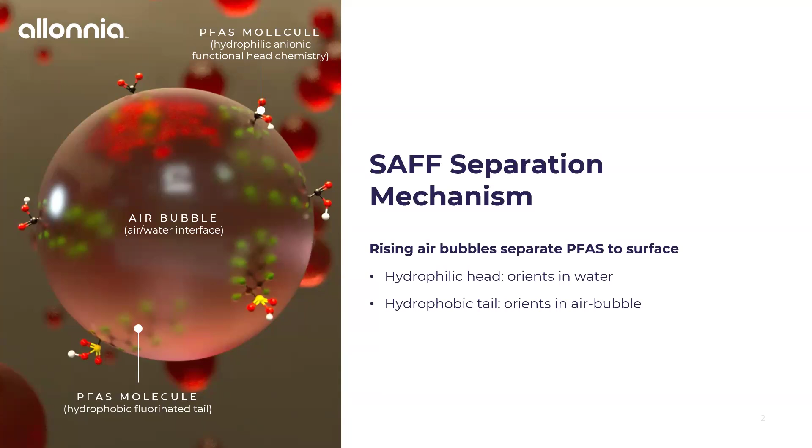As we rise the bubbles to the top of each of these fractionation vessels, which I'll show you, we are separating them in a foam matrix, removing the foam, condensing that into water, and that's kind of the overview of the process. Now, specifically for this presentation, we're going to be talking about some commercial applications of foam fractionation.

Specifically using these three kind of containerized systems, this gives you a sense of the scale of where we're operating. This is full scale, operated at landfills. Today we're focusing on talking about landfill leachate, though it could be at other sites. We're typically operating at 10, 20, 100, or several hundred GPM, and that might include multiple containerized systems, or something developed out of the box.

But the case studies that we'll talk about later today are mostly focused around using these kind of containerized systems. So we're looking at 40-foot shipping containers up to 100 GPM, or more commonly, maybe around 50 to 70 GPM, which would be pretty common for a lot of private or municipal landfills.

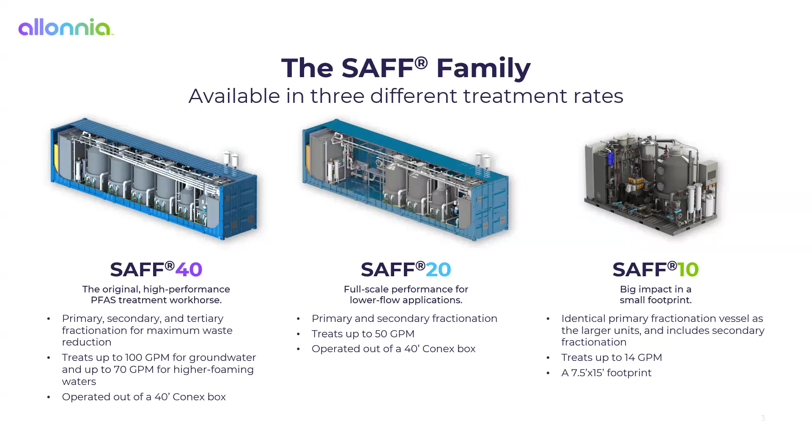Now, getting into a little bit more about what's in the box. So I talked about the foam fractionation process, how we're introducing air. What we have here is a batch-wise process with 4 primary fractionation vessels in parallel. So when I say primary fractionation, I mean the untreated water coming in from your site, so PFAS-impacted water, entering each of these 4 batch vessels in parallel sequence. They operate under a fixed set of parameters where we're varying the amount of air we're adding and the fill level in the vessel.

We might also be using some sort of additive or co-surfactant to help bind the PFAS to the bubbles, or other additives such as water chemistry adjustments to optimize performance, reduce scaling, things like that, common options that might be applied in these treatment trains. It's going to undergo that batch process and then discharge treated water.

Now, from that first process, remember we're generating a foam waste. So maybe 5, 10, 20% of that initial volume is going to be a primary foam fractionate or foam concentrate waste. And that primary waste product from this step undergoes iterative sequences of further fractionation. So we're repeating the foam fractionation process, this time under different geometry and using applied vacuum, to try and create a tall foam column.

We almost think about this like a dewatering step. So instead of the primary foam fractionate from this first process where we're making a lot of waste, here in the secondary and tertiary steps of foam concentration, we want to make as little waste as possible. I'll talk about why that's so important and how that ties into our next presentations from Revive.

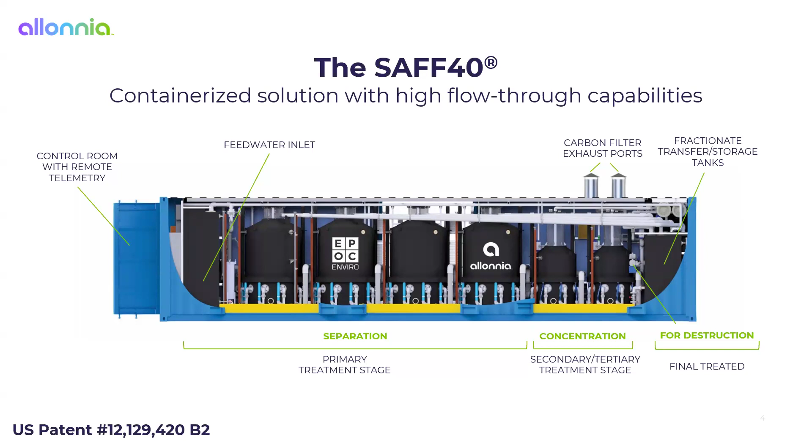So finishing out these final waste concentration processes, we have a low volume, high concentration waste for destruction. Again, this is kind of a containerized water treatment plant, so that includes control room, telemetry, all of the air is routed through air emissions control, and all the storage tanks you need are on board. We typically deploy these for pilot systems and full-scale installations at landfills, commercial facilities, or remediation sites.

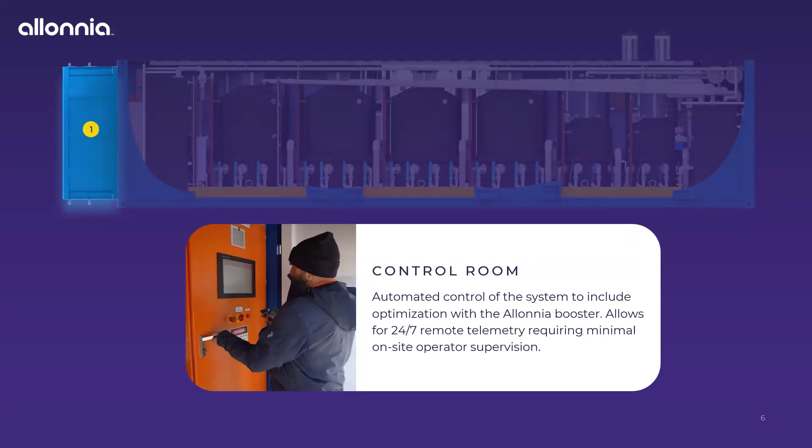Just walking through this in a little bit more detail, you can see a picture of the control room here. This is where our on-site operator would make changes to the aeration settings, batch times, things like that. Water is coming in through a holding tank here, so we have essentially one equalization holding tank.

One great thing about foam fractionation compared to some of those other technologies we referred to is that it's not very picky with respect to pretreatment. So we don't need to worry about things like high concentrations of TOC, TDS, TSS, almost all of that, and we've even run just straight landfill leachate with no pretreatment whatsoever, straight through the foam fractionation process.

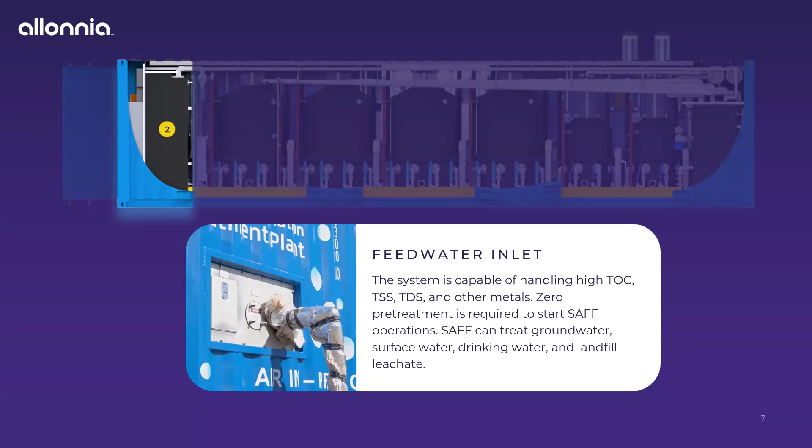Now that water foams naturally because of all of the other co-contaminants in the water, not usually the PFAS, but tends to be TOC and a cocktail of other chemistries that contribute to foaming in landfill leachate specifically. So part of the cost benefit, which I'll talk about more in a minute, is avoiding pretreatment costs associated with carbon or resin-based systems, which might not work very well with a really high-strength complex matrix like landfill leachate.

Now, again, primary treatment, so we showed those 4 batches. Here you can see in a little better detail where we're introducing air at the bottom through these venturis. So rather than using an air diffuser or something like that, we are pumping water continuously, small orifice, injecting air, and creating very small bubbles.

So we're trying to maximize, to some extent, the amount of surface area of the bubbles. That's more important than air volume, which you might be more familiar with if you've ever worked with technologies such as air strippers.

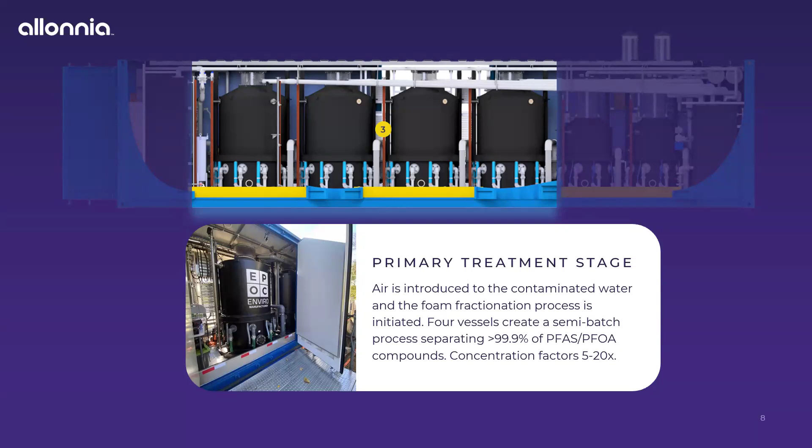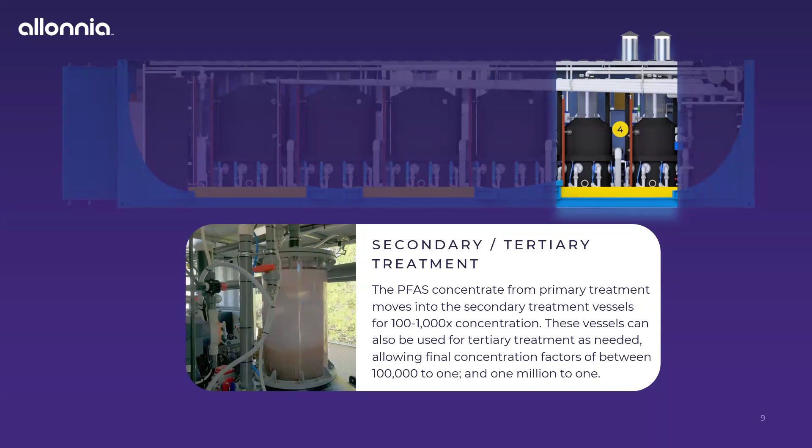Again, treated water discharge from this stage. And then in this step, you can see this nice picture showing the foam column I mentioned, right? So here we're creating a tall column of foam, extracting just the driest foam from the top, gradually using vacuum. And then the bulk liquid from this step is recycled back to primary fractionation for further treatment.

The waste product from that is then sent to destruction, which will be the focus of the second half of this talk. So this gives you a sense of what the volume reduction is from each component. On a grand scale, it depends widely on the site and the unique characteristics of each water we're trying to treat.

But each stage might reduce just 5 to 20 times from the primary stage. So this time we're still making a lot of foam from that first stage. The secondary and tertiary stages are really more focused on volume reduction, so we see another multiple of 100 to 1,000 or more in those later stages.

So for many sites, if we get a total 1,000 times concentration factor for leachate, that would be pretty typical. That's normal for some of our commercial installations. That would mean for every 1,000,000 gallons you treat, you would generate 1,000 gallons or less of liquid waste and no solid waste.

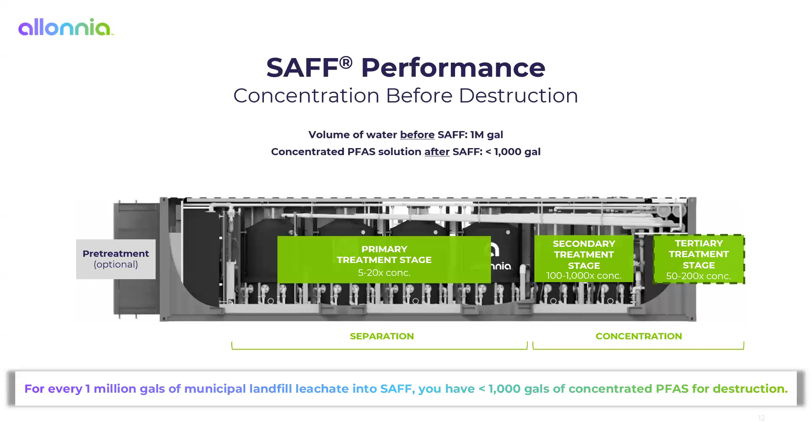For waters that don't foam very much, think maybe a groundwater or drinking water type application, we're going to be able to make a lot less waste by virtue of having very low foaming and very dry foaming. So we can really extract a lot of PFAS without carrying over too much water with it.

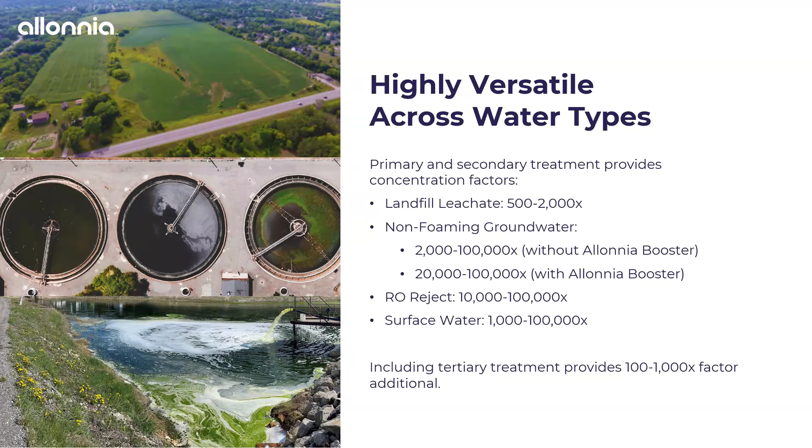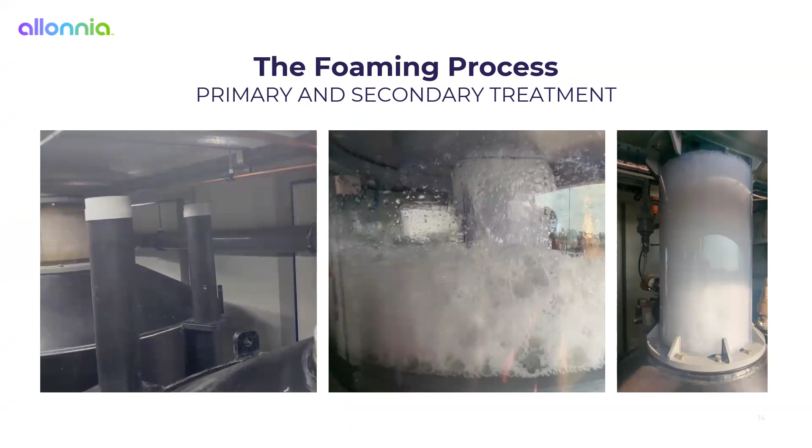Here you see a little bit more what the foam actually looks like in action. So this is primary fractionation foaming to start from a landfill. You can see this foam coming up through the primary fractionation vessel, spilling over a little spillover weir, and that foam is then being pushed out by air and collapsing into a tank, forming liquid.

Here's an example of the end of that process. So this is after we've spent everything in the water that foams, and now we're essentially just pushing bubbly water up off the top. And here's an idea of what the secondary fractionation foam looks like. You can tell, compared to that previous foam that seemed much more wet, it was kind of sinking down and moving more by gravity.

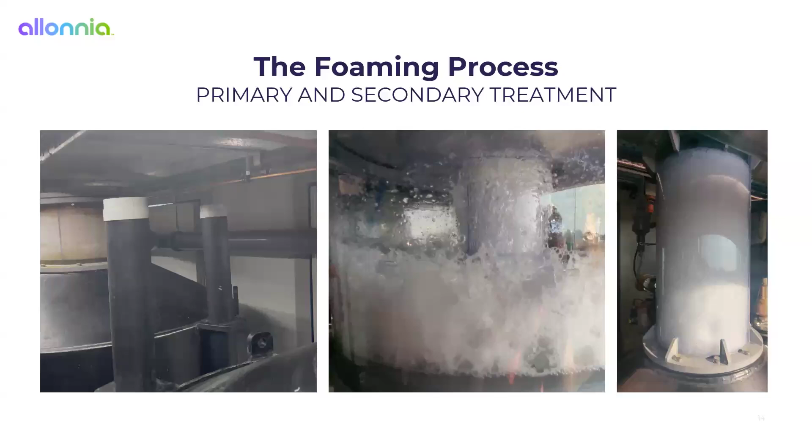In this last video, you see it being sucked up by vacuum, and you have this very tall, dry foam column, which doesn't carry as much water with the PFAS.

So why do we use foam fractionation in the first place? It's not that we're removing necessarily more PFAS than other technologies that have existed for a while and are common in these applications, such as carbon or resin, like I talked about. The primary reason many people are considering foam fractionation is because you can remove the same amount of PFAS, perhaps, as those technologies for a lower life cycle cost.

This is really important when we're talking about landfill leachate, water that is famous for having many, many co-contaminants. Typically, most landfills might be sending their leachate to a municipal wastewater treatment plant, not commonly doing whole-scale water treatment on site. They might be treating for a couple things, maybe nitrate limits, or some solids or metals they have to handle before it goes to the wastewater treatment plant.

Now, a lot of times we're saying, well, you need to treat the PFAS before it goes to the wastewater treatment plant, because we don't want to treat for PFAS at the MGD scale at the centralized facility when the vast majority of PFAS mass coming into that facility is coming from the landfills.

So using this targeted technology that is not going to remove all of or be inhibited by all the other organics, solids, metals, co-contaminants in the leachate is really important. Whereas if we were using a resin or a carbon, we would need to do so much pre-treatment to get to the PFAS that it becomes much less cost effective.

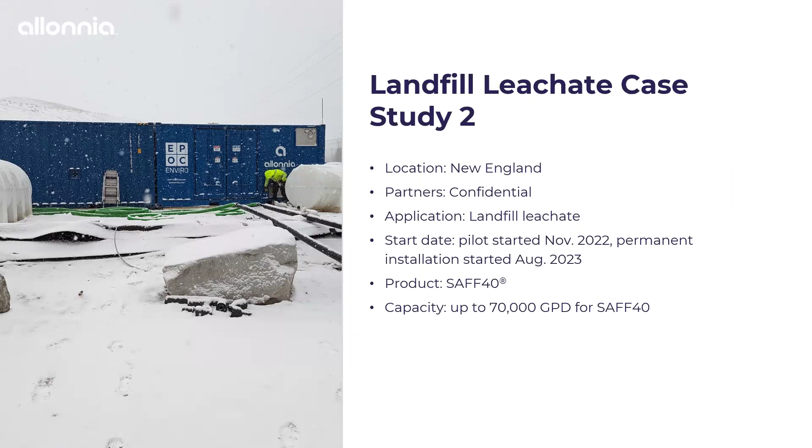Here we have a system being deployed for treating up to 70,000 gallons per day, getting a little bit higher concentrations, above 1,000 nanograms per liter. We have some low-level detections of PFOA and PFHpA in the effluent after optimization, but for the most part we're removing those long-chain PFAAs to non-detect. Similar concentration factor here, greater than 600 times.

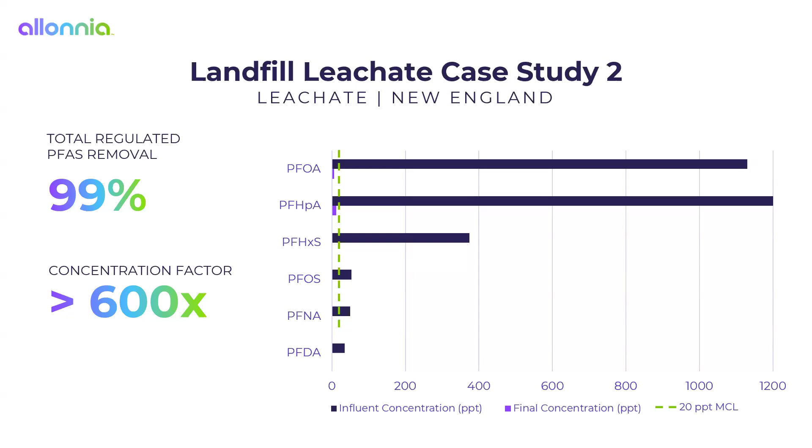So what I mean by that is for every 600 gallons treated, we're reducing the waste volume to less than 1 gallon.

Now, we also see this in quite a bit of literature as well as field work: adding some booster agents or other surfactant chemicals can enhance PFAS removal. We didn't do that at this site, but in some cases we add cationic surfactants specifically, such that the cationic molecule has a temporary electrostatic attraction with the PFAS molecules, which are anionic, at the bubble surface. Because those are also surfactants, they get captured and form these bubbles, sit on the surface, rise up, and their interactions with the PFAS at the bubble surface help keep the PFAS on the bubble and prevent them from resuspending in liquid during separation.

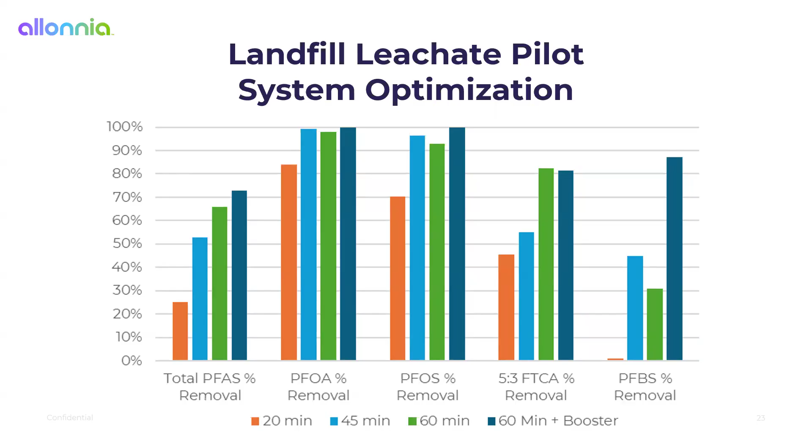So what we know, to summarize very briefly, is that you can measure PFAS in the air emissions - mostly they transport via aerosols or droplets. Typically we're not measuring volatile PFAS with this process because it's not a destructive or thermal process. We're not measuring PFAS transformation or products of partial destruction or combustion. We're just measuring usually these EPA 1633 type compounds. Most of those are transported via aerosols, which we can then capture using some sort of condensate trap and adsorbent media based treatment train. The size and scale of that emissions treatment depends on what you're trying to achieve, but we can get it down to basically nothing.

Does that help? So TO13, is that the stainless steel? So we tend to be using Orbo tubes, like resin tubes in series with a condensate recovery step. Not vacuum canisters.

Nice talk. I was wondering, have you investigated first of all what is the size of the bubble from fractionation? Have you investigated the effect of the bubble size? Yeah, so a bit of work has been done on that, more so at the laboratory scale. This is part of the thinking that goes into how you introduce air, whether you're using Venturis or some other method. There's some more recent work in the literature talking about micro bubbles versus nano bubbles, essentially if you were to categorize them. I don't have specific bubble sizes to share, but using smaller bubbles is a focus.

Is it safe to say that water with higher concentrations of PFAS in it is going to foam more, or foam at lower concentrations?

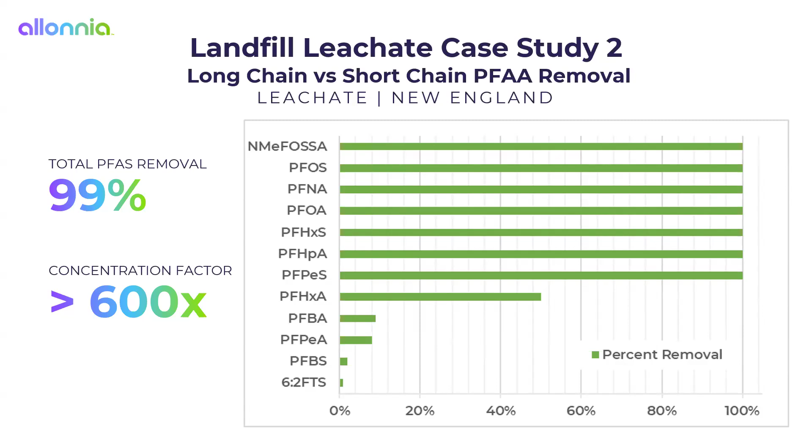We've also seen applications where, looking at that cost model I shared before, you might have a drinking water plant that draws from 20 wells, but only one of them has a cost curve that looks problematic. So we see situations where you can target different treatment trains for different portions of a total combined flow - that's one thing to think about.

There's also some really interesting work being done in environmental restoration programs funded by DoD, looking at in situ foam fractionation. That's not something we've been working on, but with respect to offsite mobilized groundwater and sites like that, it's something that's starting to be talked about a little bit.

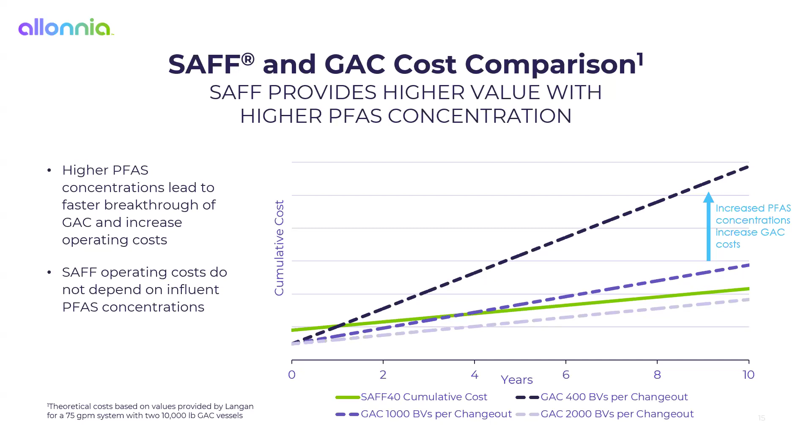Thank you very much, Zach. Yep, thanks for doing it.

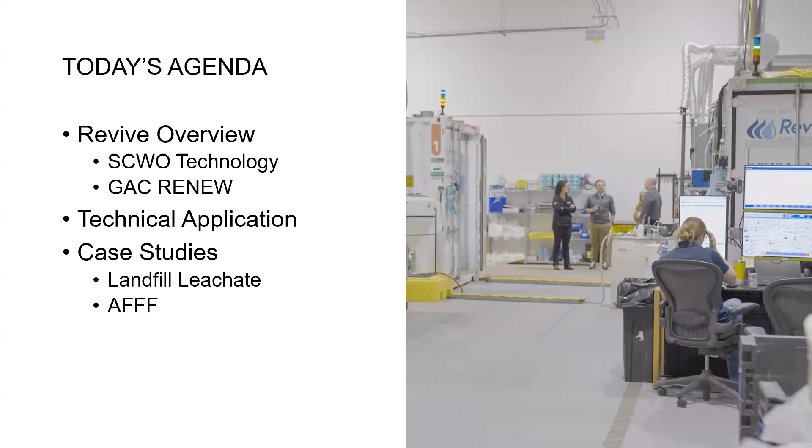So I am going to be walking us through 3 main things today. Who Revive is and the problem that we are working to solve. We're going to look at 2 of our core technologies that we use to permanently destroy PFAS, including our PFAS annihilator and our GAC renew process. And then we're going to look at some technical applications and some case study data for these processes. So the thread tying all this together is that PFAS doesn't need to be managed, transferred, or stored. It can be eliminated, and we have the operational data to prove it.

So starting off, who is Revive? Here's a brief look at what we do as a company. Revive is a water treatment as a service company focused on permanent PFAS destruction to reduce customer risk related to PFAS waste disposal. So the core premise of our work is that the endpoint of PFAS-laden waste is complete mineralization rather than concentration, transfer, or storage.

We have several patented technologies that work to destroy PFAS, including the PFAS annihilator, which is our supercritical water oxidation based destruction technology, and GAC renew, which is our in situ carbon regeneration process. We are a technology spinout of Battelle Memorial Institute, and we are headquartered in Columbus, Ohio.

In terms of markets, our work spans 4 primary areas: aqueous film forming foam, or AFFF, which are legacy firefighting foams, is a significant portion of our destruction work. Revive has partnered directly with several states on AFFF take-back programs, collecting and destroying this material.

We are also in the landfill leachate space from commercial and industrial landfills. This is a rapidly growing area for us as regulations tighten on what treatment plants can accept. We also work in industrial wastewater from PFAS using and PFAS impacted operations. And we are also in the groundwater remediation space at PFAS impacted sites.

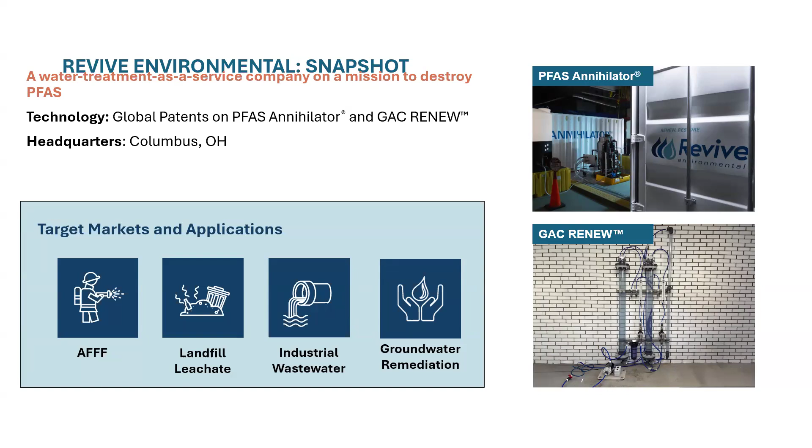Leveraging the combined experience of our general counsel, our product managers, our chief technical officer, and our PFAS solutions director, Revive is able to take a novel technology from development through commercial deployment, regulatory approval, and onto customer success.

All right, so now let's get into the problem that the Revive team is working to solve. One of the most important things to understand about PFAS remediation is that there's no single universal challenge. The technical requirements vary significantly depending on the source and application.

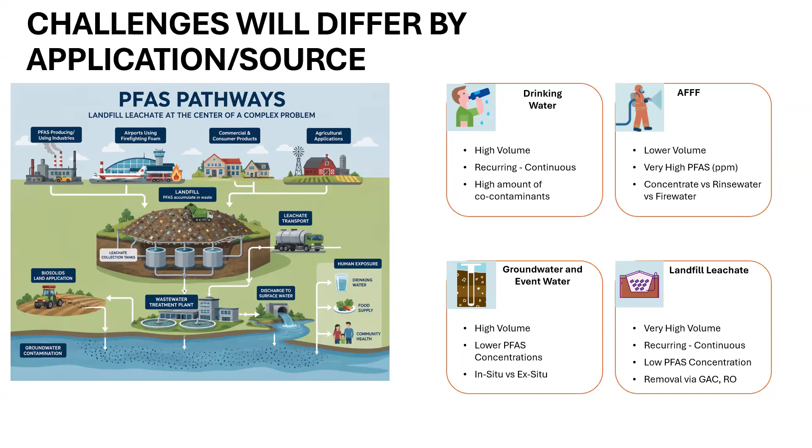And then it enters the supercritical state, which is when water is in the supercritical state, several key changes take place. The water no longer behaves like a conventional liquid or gas. The density drops to about 10%.

Water is no longer a polar solvent, and oxygen is fully soluble. So how does this help us? Well, PFAS compounds are notoriously stable in polar environments, and they're comprised of that carbon-fluorine bond, the strongest bond in organic chemistry. But while they're in this supercritical state, in a fully oxygen saturated environment, the activation energy required to break those bonds is overcome and the molecules can be destroyed.

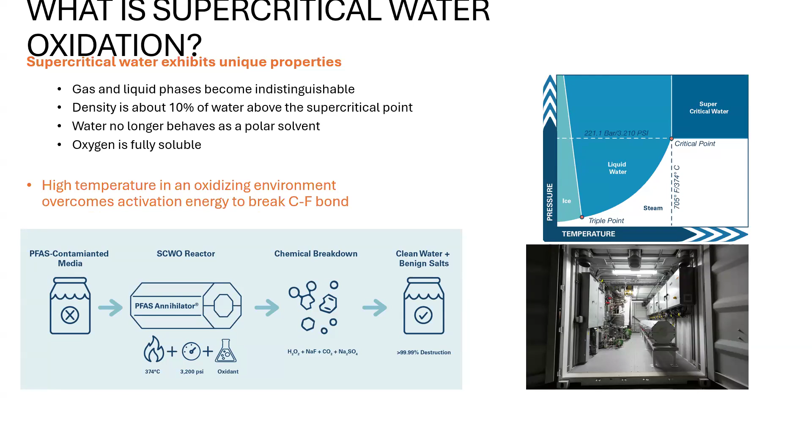So let's take a closer look at what's going on inside our SCWO destruction technology, the PFAS annihilator. The annihilator operates at 3,200 psi and 374 degrees Celsius, driving those PFAS into that supercritical state. Once in that state, controlled oxidation breaks PFAS compounds down completely. The end product is carbon dioxide, water, and inert salt. So there are no toxic byproducts and no residue that requires future treatment.

As part of the process, SCWO does generate CO2, but at quantities so low that they are far below the de minimis standard and do not require any permitting. The annihilator's performance has been verified against the EPA's 2024 Technology Evaluation Framework and has achieved greater than 99.99% verified destruction. Each batch that goes through the annihilator is analyzed and certified, generating a traceable record for influent composition and destruction outcomes. So since that PFAS has been destroyed, this is a huge risk liability release for our customers.

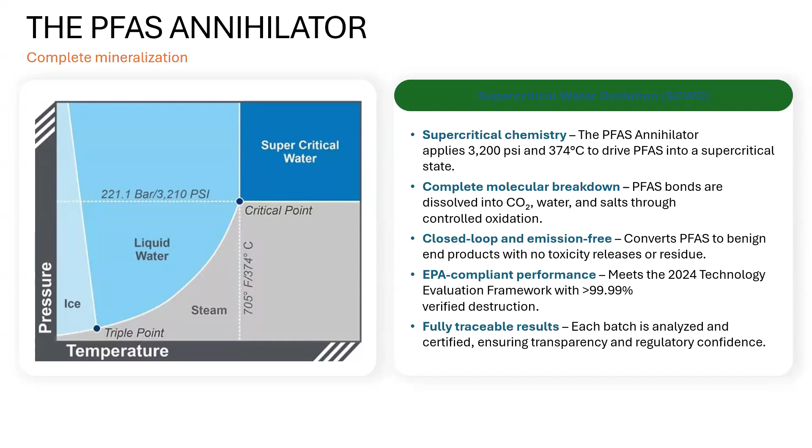So now that we understand supercritical water oxidation a bit better, let's look at how it fits contextually into the landscape of innovative technologies focused on PFAS destruction. There are four main technologies in this space: SCWO, supercritical water oxidation; HALT, hydrothermal alkaline treatment; ECO, electrochemical oxidation; and plasma.

So when evaluating PFAS destruction technology, several criteria matter: destruction efficiencies across the full PFAS suite, the ability to handle a wide variety of waste matrices including concentrated and complex streams, commercial readiness—things like permitting, operations, third-party verification data, and proven scale—and an operating track record long enough to give regulators and customers confidence in the technology.

So SCWO is able to meet all of these criteria. It has over 20 years of operational history in related applications and is fully commercial and permitted today. SCWO is also able to handle a wide variety of contaminated matrices and operates with a short residence time. Its destruction profile covers both long and short chain PFAS.

But no technology is without its challenges. In terms of SCWO, these include susceptibility to salt plugging, corrosion management at high temperatures, and readiness for solid matrices—all areas that we actively engineer around.

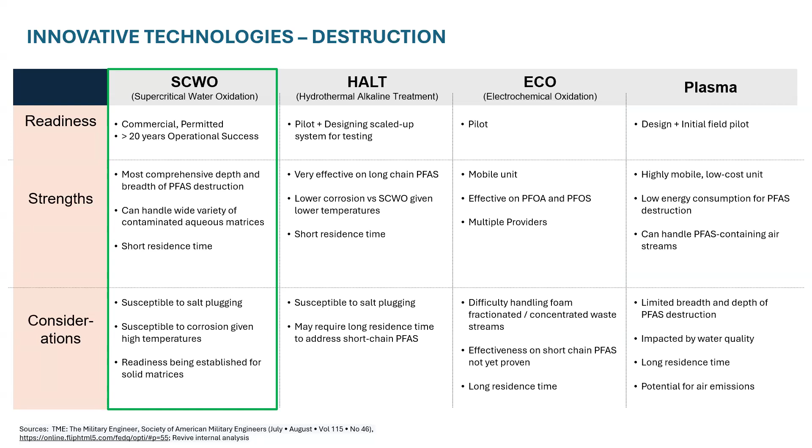So we've now looked at how the PFAS annihilator works and where it sits in a broader technical landscape. Now we're going to move on to Revive's second core technology, which is GAC Renew. This technology serves to solve a different problem. Here's how it works.

A facility has GAC vessels which have been cleaning something that is PFAS impacted, and now these GAC vessels are saturated with PFAS. So we mobilize to site and use an alcohol-based solvent on those spent GAC vessels. The solvent is then cycled through the spent GAC beds, and on average this cycling takes 24 hours. We use about 1 gallon of solvent per 4 pounds of GAC. The solvent removes the PFAS off the GAC, and the GAC never has to leave the vessel.

Once the GAC has been successfully washed, we recollect the solvent, and the GAC is rinsed with water before it is returned to service. The spent solvent is then put through the solvent recovery system, which pulls the solvent out of the water via distillation. This leaves us with some PFAS-impacted water, which we then run through our PFAS annihilator, generating a certificate of annihilation, which ensures that the PFAS has been destroyed, the loop is closed, and it alleviates the customer of PFAS risk and liability.

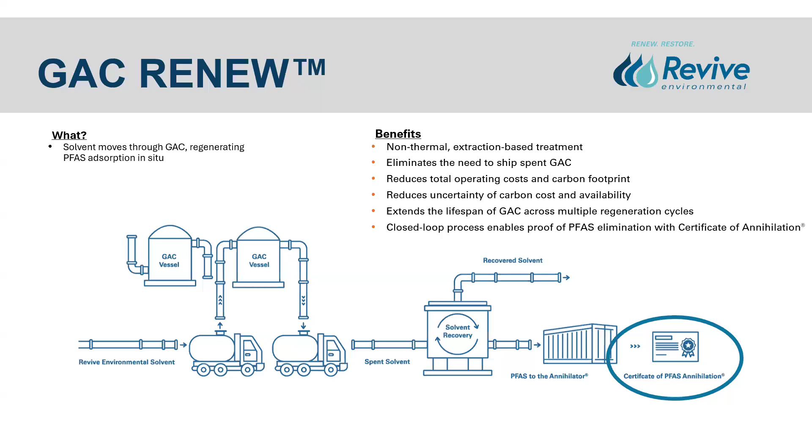So we've got a little bit of data on GAC Renew's ability to remove PFAS within the GAC vessels. Using this solvent-based regeneration process, we are able to strip greater than 97% of PFAS that has been captured in the GAC. That's seen on this chart on the right here. Blue bars represent different PFAS, both long and short chain, and this orange one on the right is the total across them, just above 97%.

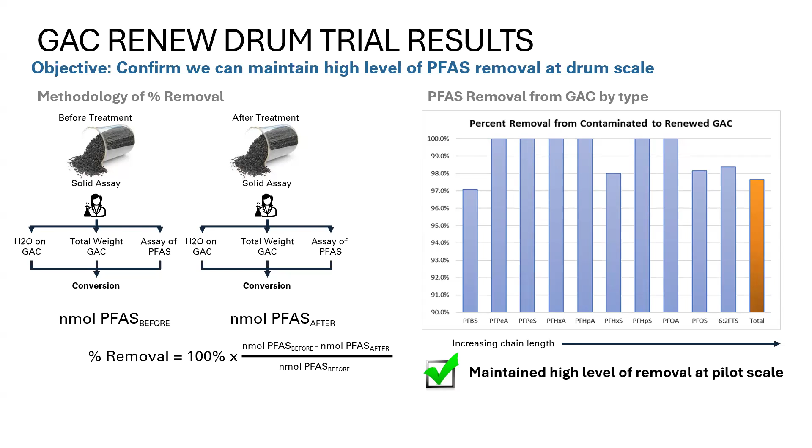Now let's talk about what happens to that PFAS concentrate once it's recovered. So we just talked about the GAC and its ability to remove PFAS. Now we're going to talk about that concentrate and the solutions.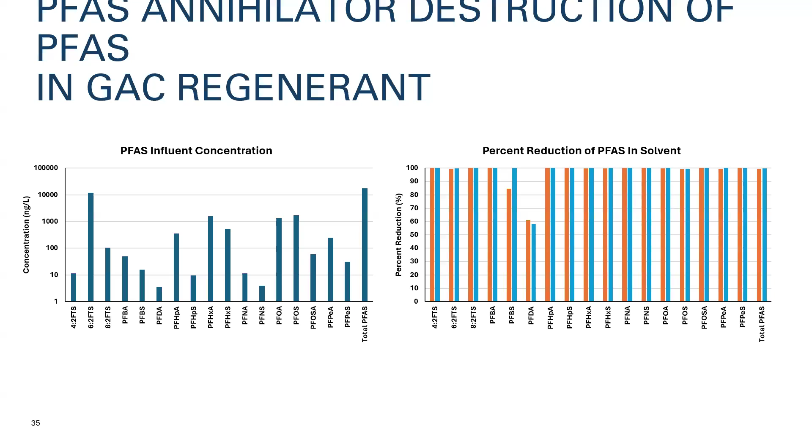All right, now let's take it back to a more bird's eye view of the PFAS pathways. This slide illustrates the breadth of waste streams that our integrated system is designed to handle and close the PFAS loop for. Whether the source is rinsate, landfill leachate, industrial wastewater, PFAS in groundwater, or AFFF, all pathways lead to the same endpoint: complete destruction via the PFAS annihilator. This slide also does a good job of showing where pre-treatment technologies like foam fractionation often come in handy.

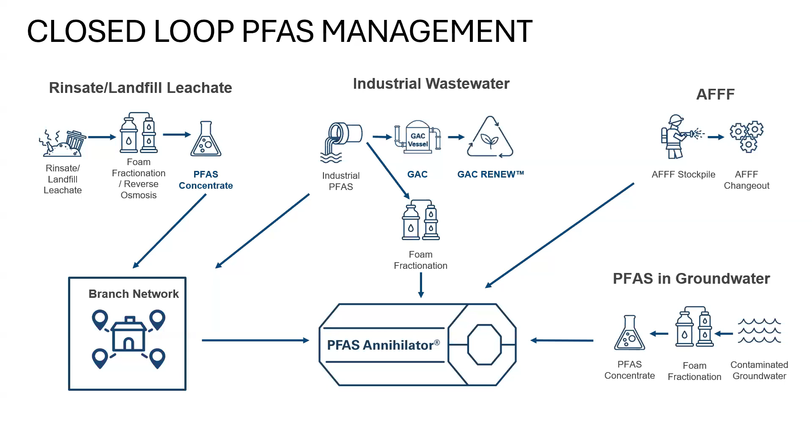Within some of these there is quite a bit of complexity. Now we're going to look in this category of AFFF at some of the varieties that exist within that waste stream.

Within AFFF, we are dealing with 3 distinct substreams: the concentrate, the rinsate, and the fire and groundwater. Starting with the concentrate, the undiluted AFFF product, we have very high formulations and very high concentrations of PFAS, and there's a very diverse variety of different carbon content within these formulas as well. It's also estimated that there's about 15 million gallons of AFFF concentrate out there across DoD, airports, and different civil sites.

Looking to the middle, we have rinsate, which is often produced from cleaning large firefighting vehicles, which presents an entirely different challenge. Volumes are typically about 3 times the system capacity for concentrate, so PFAS concentrations are lower, but the potential use of special rinse agents also introduces additional chemical complexity. Revive often leverages pre-treatment technologies like foam fractionation in these types of situations.

And then on the right, we have fire water and groundwater: very high volumes, low PFAS concentrations, but now layered with co-contaminants, including other hydrocarbons that need to be accounted for in the treatment design. The SCWO system is designed to handle all 3 of these streams through the process, though the process parameters and pretreatment requirements differ meaningfully across them.

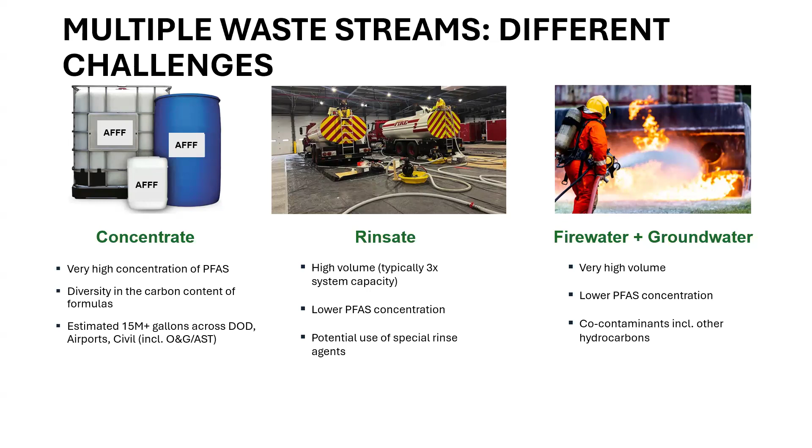Taking a closer look at another common waste stream, we have landfill leachate. Landfill leachate is one of the most challenging PFAS matrices from a regulatory standpoint. It's continuous, it's high volume, and it contains both short and long chain PFAS compounds, including many of the emerging contaminants now under some regulatory scrutiny.

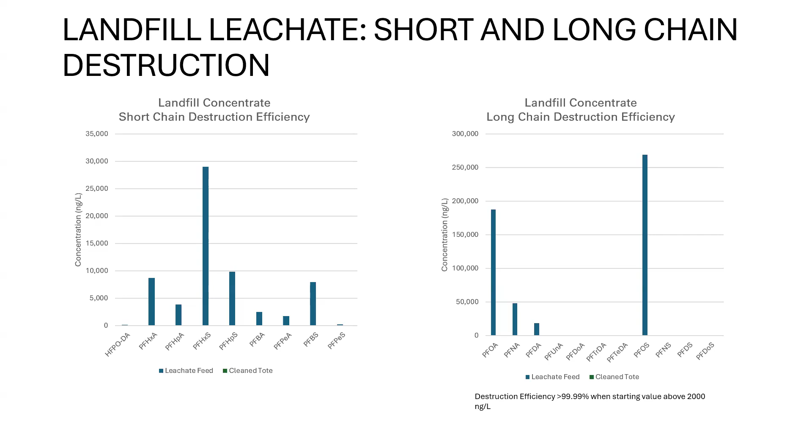This data shows our verified destruction performance on landfill leachate samples. When the starting PFAS concentration is above 2,000 nanograms per liter, our system achieves greater than 99.99% destruction efficiency for both the short chain and long chain PFAS. This is not a selective result — this has been seen across the full spectrum of PFAS present in the sample.

And then for our second case study, here's a look at some AFFF, specifically Ansulite 6%, which is a legacy foam that's formulated widely across military and aviation applications.

So again, the data speaks clearly. Starting concentrations above 1,000 nanograms per liter, we achieve greater than 99.99% destruction efficiency across both short and long chain PFAS. AFFF formulations are among the most chemically complex PFAS waste streams that we see. They contain dozens of unique compounds, including short chain variants that have historically been resistant to other destruction methods. The destruction efficiency data shown here covers the full range.

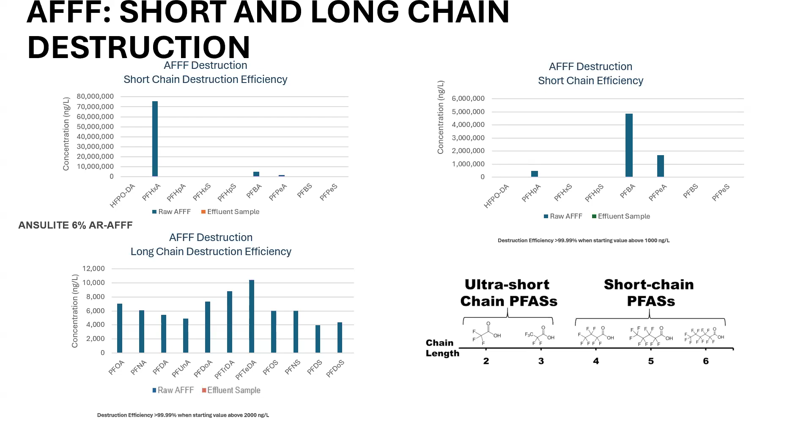So to close out, I wanted to summarize some key technical attributes of SCWO as a destruction platform. Starting off, it is destruction, not management. SCWO achieves mineralization of both short and long-chain PFAS compounds, which eliminates the material rather than concentrating or transferring it.

It also has regulatory compatibility. The system is designed to meet current discharge permit thresholds and has performance headroom to accommodate anticipated tightening of regulatory limits. We're also compatible with upstream technologies. SCWO operates effectively alongside upstream concentration technologies such as foam fractionation, and organic co-contaminants in the waste stream do not inhibit the oxidation process.

And as I touched on before, waste is very minimal. PFAS is mineralized, not moved, and the byproducts are water, inert salts, and CO2. And we are a permitted operation. Revive currently operates 2 permitted destruction facilities, and we are at commercial scale. So the technology is operating at full commercial scale, processing multiple influent waste stream types across sites in the United States.

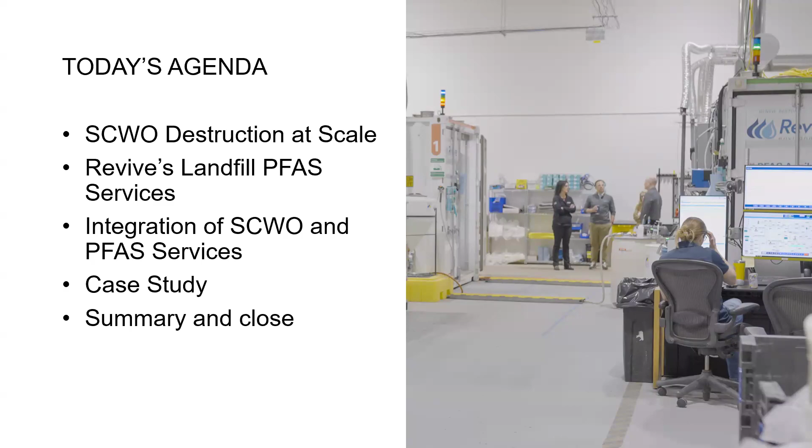Okay, so this is a callback to Mandy's deck from earlier. Just by a show of hands, is anybody here working on a PFAS project? They've got something out in the field that they're working on. Okay, couple. All right, how about the gentleman in the back? Do you think your customer or client has, say, tens of millions of dollars to spend on PFAS remediation at a site? They want to implement equipment, they want to do operation, they want to spend the whole kit and caboodle - are they prepared to do that?

Yes. Maybe not all, maybe some. Yeah, some, but maybe not everybody, right? Most of the PFAS remediation projects out there, the folks that are working on these are not necessarily prepared or want to or need to spend that type of money. A lot of these types of projects are smaller scale or they're temporary. There's a host of different reasons that they might want a service element instead of having to buy the equipment and actually operate this themselves, learn how to use it, implement it, build the infrastructure around it.

There's value in that service component. Having a rental or short-term option is really what's going to provide them with the ability to be successful either in the short or long term. So this is what we're doing here at Revive. We're marrying different groups of technologies together to provide those options for customers in a variety of different fields.

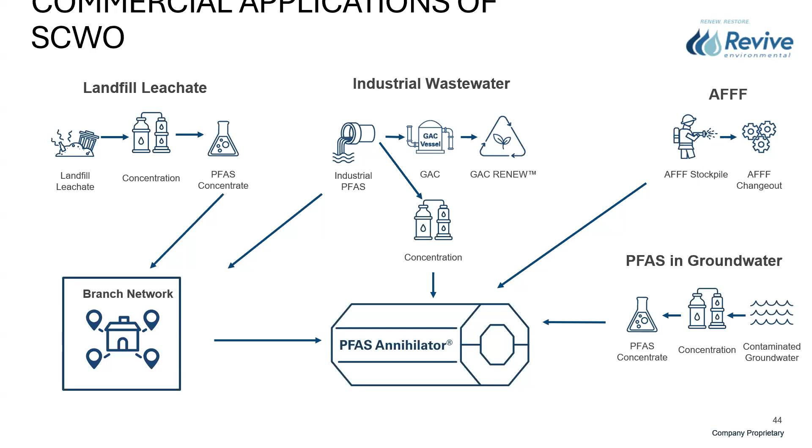So again, we talked about some of the industries where this is applicable. We're not going to get into all of these here for the sake of time, but the point of this slide is really to outline that there's a host of different problems when it comes to these PFAS remediations that require different technology groups. Starting at the right, these airports, we're talking about AFFF, a firefighting foam.

Those are low volume, typically high concentration sources. They're a little bit easier to manage. But as we work our way up here, you're getting more and more complex. And that could be either how the PFAS contamination is actually existing within the facility or in the environment. It could also be the water matrix that you're dealing with. And so there's a need for either variability or flexibility with that treatment program.

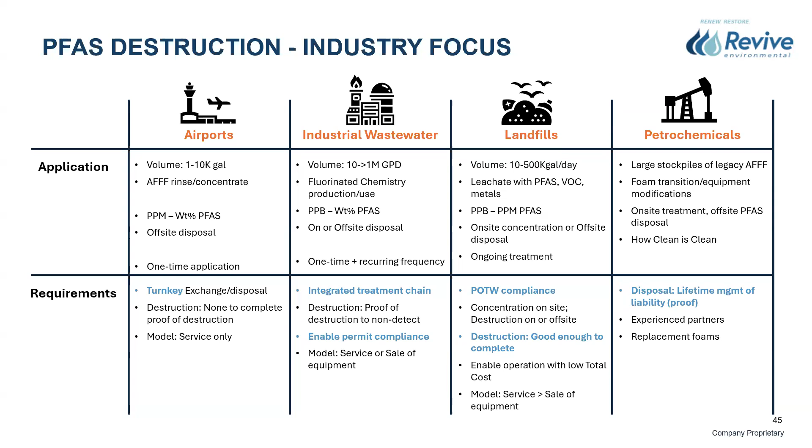There's also going to be a need here for somebody that's going to be able to provide that understanding and that expertise for what's appropriate. How do you apply this in a cost competitive way?

So how does Revive then translate these needs into services or options for those that are afflicted with PFAS remediation? We start with GAC Renew here, which Mandy covered earlier.

This is a technology that's really taking advantage of a tried and true way to remediate all different types of contamination, which is granular activated carbon. GAC's been around for a long time. It's well studied, and it's a way to remove PFAS. It's pretty effective - I say pretty because it has its own shortcomings, but by and large, it does a good job with PFAS removal.

But the challenge can be, especially in a landfill setting, you're also removing, in addition to PFAS, all the other stuff or contaminants that it can possibly adsorb. GAC does not play favorites. It doesn't want to just take out what you want it to take out. It's going to take out everything that it can.

And so if you're talking about a landfill setting where maybe they don't have the ability to provide another treatment, or GAC is just what they have, this can be costly. This can be very service intensive, and it can be just inconvenient, quite frankly, for some of these facilities.

And so this is where a technology like GAC Renew can be very valuable. You have a service component come in, somebody's going to be able to actually strip that PFAS off of the GAC, so you can reuse that material many times. I'm talking PFAS here, but you're also going to recover additional capacity.

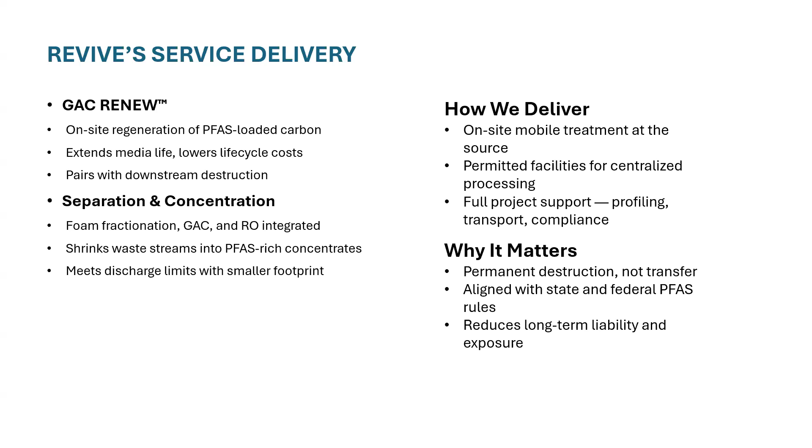That can be done in a hybrid format. It could be done on-site, could be done off-site. The model we're going to talk about here is actually the hybrid I just mentioned. It's doing on-site concentration or removal and off-site destruction. We'll talk about why that's an advantageous model here in a second.

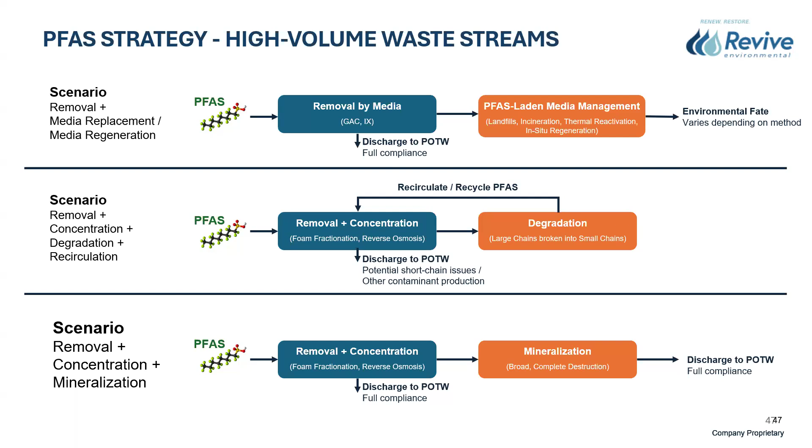In the case study we're going to show, we'll talk about how we did a cost benefit analysis of some of these options, how we ended up where we did, and why we chose foam fractionation versus some of these other alternatives.

For example, if you're talking about a water balance at your landfill, that can sometimes be a huge challenge. Like, how do I actually manage, let's say I'm opening up a new cell, a ton of new water that's coming into my operation. I might need more capacity when I go to discharge my leachate. There are many different reasons landfills have to manage this leachate on a more close basis than maybe they had in the past. And PFAS is now becoming a part of that analysis.

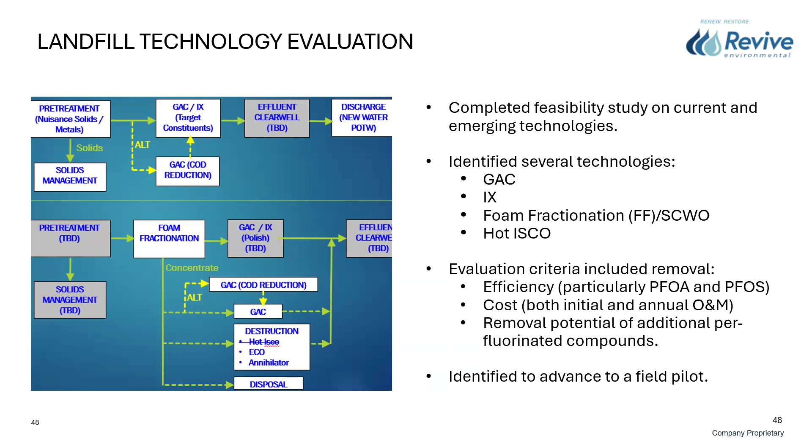So why are landfills so challenging to treat or evaluate sometimes? Number one, the matrix can be very complex when we talk about what that chemistry profile looks like. There's not just PFAS in that leachate, there's all different types of co-contaminants. You've got a lot of other organics, you've got a lot of ammonia, and everything comes out with that leachate.

And it's going to be variable site to site, variable season to season. In a landfill setting, if you've got a rainy season, if you're in the winter months where you're getting a lot of snow melt, you can have a very dilute leachate, much more volume. Summertime, it dries up, less volume, much more concentrated contaminants. So that can be a tough push and pull with the treatment program.

So your treatment needs to be flexible so it can be successful in all of those settings, all times of year, all flow conditions. And that gets to the other kind of component here, which are the flow conditions that we experience in landfills.

Now, most landfills as they operate are relatively steady. If it's a 100,000 gallon per day landfill, it's going to swing within, say, 25,000 gallons per day, roughly. Some do a little bit more, a little bit less, but roughly speaking, they're going to be kind of consistent.

But I mentioned earlier, you've got landfills that are growing. So sometimes you have facilities that are opening up new cells, and they might double their leachate production seemingly overnight, or they might close a cell. So their leachate production might drop off, and then the chemistry could change. So you get highly variable conditions there.

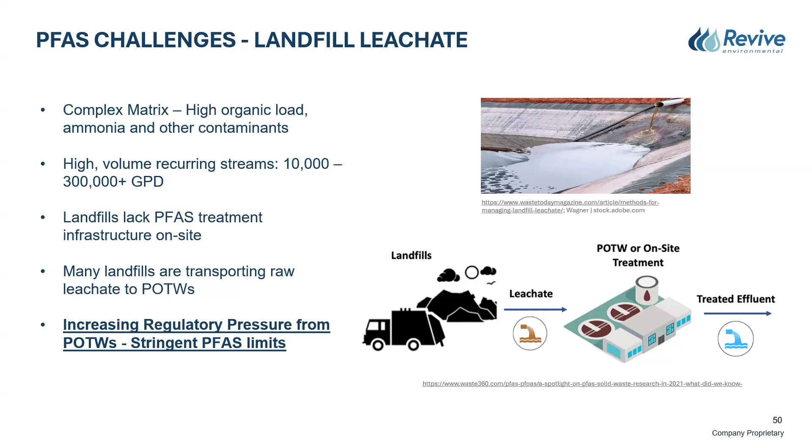an upcoming regulation. So all that combines to, okay, let's say a POTW or a county or a state now wants to implement treatment for PFAS. How do you go about and evaluate that? And this is what our customer came to see.

So the case study we're going to cover here is a private landfill. This was out in the Midwest, and they had a couple of unique characteristics that made them in some ways a great fit, but also in other ways a major challenge to work through for remediation.

So what made them unique? Number one, really high flow conditions. So this site can generate more than 100 million gallons per year. That's if you're doing the math there, that's a couple hundred gallons per minute at times. So for a landfill leachate, that can be a pretty high flow.

And that's also a huge swing. You know, again, you're in the Midwest, you can have nasty winters. Sometimes you get a lot of snow melt, so you get a lot of volume increase. Sometimes you get none. So that was the number one challenge. How do you actually manage that water balance effectively?

A couple other challenges that we saw. The site itself was somewhere where, again, there was no infrastructure, there was no building. It's not like you can just say, hey, bring in my widget 1, 2, 3, and you start running. So now all of a sudden we have PFAS treatment and we're meeting a regulation. So we had to really look at this from a ground up perspective.

Now, what were the conditions that maybe made it unique in a positive way? So we had some groundwater intrusion with this landfill. So this was a site that not only had leachate, but it had groundwater blended in with the leachate. Zach mentioned before that sometimes groundwater can present a much different profile when it comes to foam fractionation. In this case, it was actually beneficial. And I'll show you how beneficial it was here in a second.

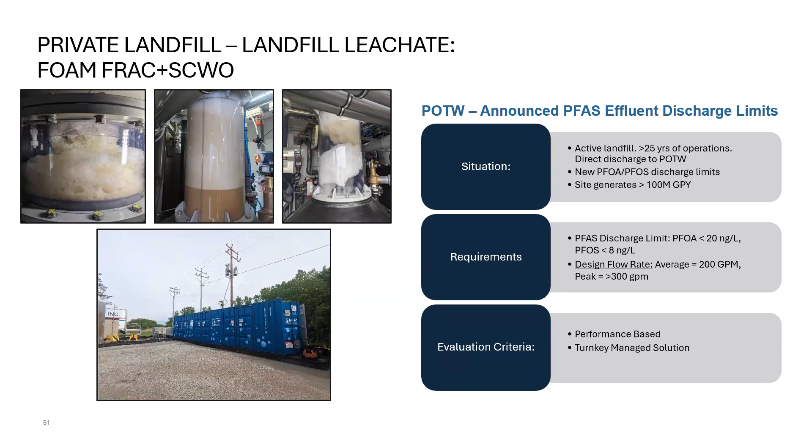And then finally, this site really was concerned about 2 PFAS, PFOS and PFOA. Now, those are tight regulations. I mean, 8 and 20 PPT respectively, that's pretty tight. But again, this technology was able to meet these criteria and actually exceed them.

All right, so what did we do with the landfill? So again, we have our landfill that's collecting all of this leachate into a pond or a cell. So millions of gallons over the course of the year are collecting there. And we needed to do something to get to success, which was drop that PFAS down to 8 and 20 PPT and discharge it to the local city. And we had to get that done in a relatively short period of time.

We had about 2 years, which is not a long time to go through that entire kind of build out step. So this site, we had done a pilot using the SAFF 40 that Zach presented earlier. And we said, hey, this technology really kicks butt. And what that means is we took 100 million gallons a year of leachate down to 2,000 gallons per year of waste generated. That's a huge concentration factor.

So that's dropping 50, 60, 70,000 times your volume of waste that actually needs to be managed on the back end. So you're not necessarily managing 100 million gallons per year anymore. You're now managing a couple totes a month, which is much easier to kind of wrap your head around.

The other way we were able to implement these SAFF technologies here was helpful for what we do with Revive. Remember what Mandy mentioned earlier, the SCWO system really thrives on high concentrations of organic material. It likes that spicy, concentrated waste, whatever it is - if it's AFFF, it could be a leachate concentrate. So for the SCWO process and destruction process, it improved the efficiency of what we were doing on the disposal end. You're getting less waste generated from the landfill, and more efficient destruction on the back end.

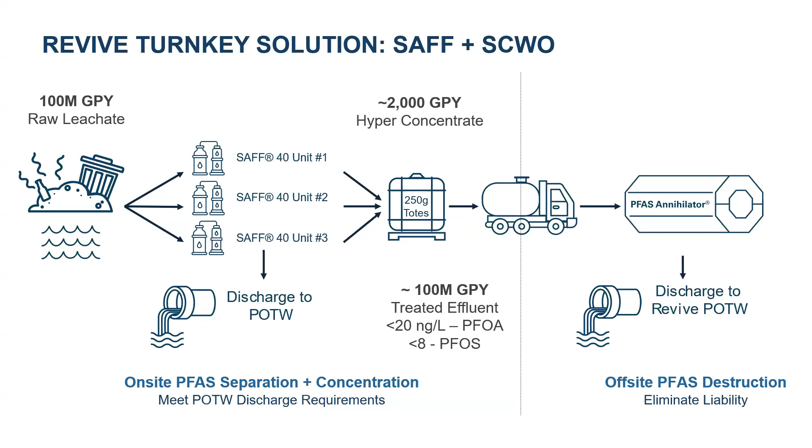And again, we looked at some destruction data before, but with landfill leachate, it's really a great fit for SCWO, and the data speaks for itself. This is highly concentrated material, millions of nanograms per liter or parts per trillion of different compounds coming into the SCWO process. And on the back end, we're seeing non-detect levels, in this case much lower than really reportable limits across the board.

We had non-detect for all of the compounds measured under the matrix. These were the top, I think 15, that were measured in terms of concentration in this particular leachate. And so the destruction was very effective. That was what allowed us to have confidence in the program to say, okay, this leachate, even over time, as maybe the chemistry changes, it's going to have a lot of flexibility on the destruction end, and it's going to be future-proof, so to speak, long-term.

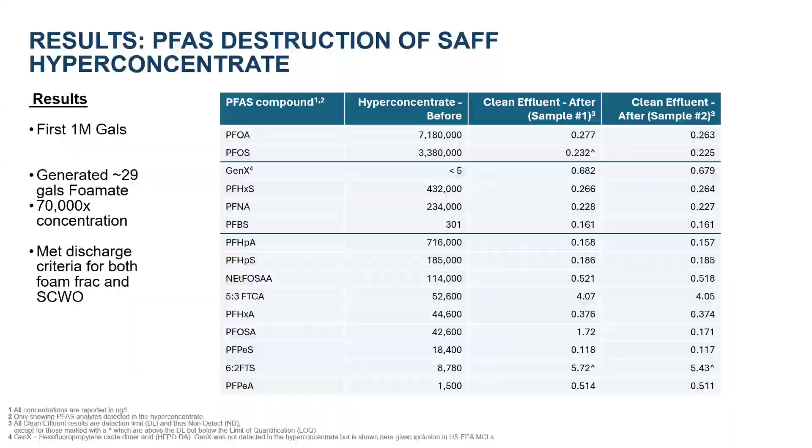So I think we're getting close to time here. I do want to allow for some additional questions. So we're going to wrap up and just talk about what this integrated offering provides for customers.

Again, number one, the part to be concerned about if you're the customer, if you're the landfill operator, is the risk of evaluating, implementing, and then managing treatment. PFAS is this big, scary term - sometimes it can be intimidating for folks to manage, or they don't have the in-house expertise to do this evaluation themselves. So when they can lean on a third party, either like a Revive or somebody like us, it can really help put them at ease, and it can walk them through the process every step of the way. It also puts an end to that life cycle of PFAS.

Because you're no longer putting the leachate back into the landfill, you're not just recycling that PFAS back into the environment - it's actually being destroyed permanently. And again, when you do this kind of method properly, there's a very small amount of waste generated, both on the foam fractionation side and then on the SCWO destruction side. So it's an effective technology from a kind of putting your green thumbprint on it. It's a relatively low energy cost option and minimal waste generation.

Again, I mentioned the flexibility before. So one of the nice parts about this integrated platform is it has the ability to push and pull. If you use foam fractionation the right way, as either regulations change or maybe the water matrix changes a little bit, you have the ability to pull different levers, and you've got that support from the service provider to understand what's going on and help to be proactive about upcoming changes.

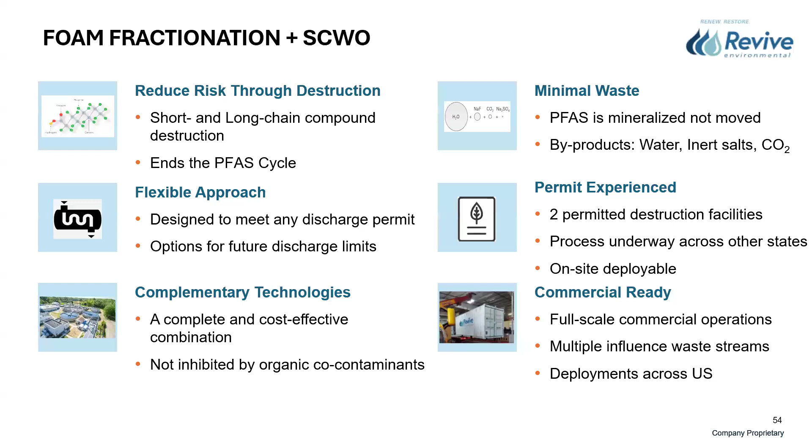And then, when it comes to implementing new technologies or meeting a permit, having somebody that's experienced is very valuable. Like I said, this was a 2-year cycle for us to implement this particular application. There's a lot of steps along the way that can sometimes be very new to folks. Air permitting was mentioned earlier - that's a big one, we get this question a lot. What do you do with air permitting? How does that look? What does the data look like? And having the right partner to help walk through that is critically important.

So again, I'm going to leave us some more time here for questions, but really the take home here is: number one, foam fractionation technology in the front end is a great way to get low cost removal of PFAS and meet a compliance point because of the way that they operate. That technology group is really growing, especially in the landfill leachate space, because of its ability to focus on that PFAS compound or compounds, not go after other contaminants like other technologies will, like GAC, RO, et cetera. And then pairing that with the right destruction or disposal technology, like supercritical water oxidation, provides that customer or end user with end of life, responsible PFAS management long-term.

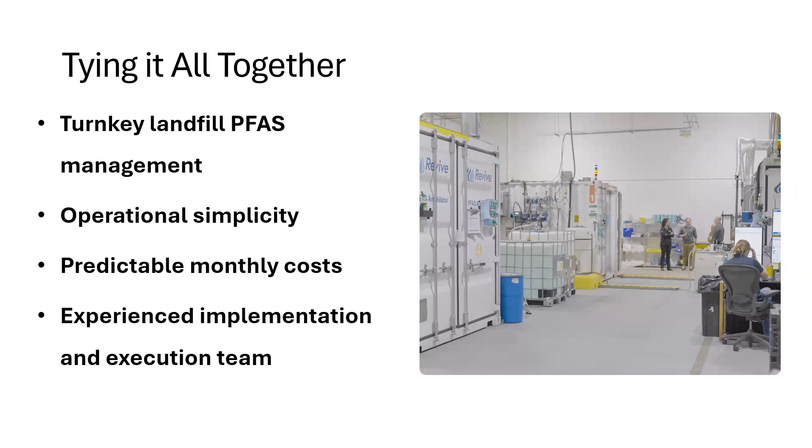Yeah, great question. So the question was: what does the destruction process actually mean? What does it mean to do destruction? And what are the byproducts? And have we done a fluorine mass balance? So a lot in that question, I'll unpack it piece by piece. When we say destruction, we actually mean the breaking of those bonds - carbon fluorine bonds that are broken. We're overcoming that energy barrier and we're mineralizing out the back end.

This is a bit technical, but when you talk about destruction, there are different levels of this. The highest level is actually mineralization - breaking those bonds and then capturing those fluorine ions with something like sodium to create salts, which are then inert and you can dispose of responsibly. So that's what we mean when we say destruction. Every time we do a destruction run, we're meeting an EPA drinking water standard effluent that we then discharge to our local city.

The second part was the fluorine mass balance - how do we actually navigate that? Because again, we're using 1633 here as a basis, but that's not all the PFAS that exist. As a rule, because we're a commercial company, we do what our customers ask for, and most of our customers want 1633 as a basis. However, we do have data, and we've had third parties do studies on actual organic, inorganic fluorine, doing that mass balance from start to finish. So if you're interested in that, see me after - we can share some white papers on that.